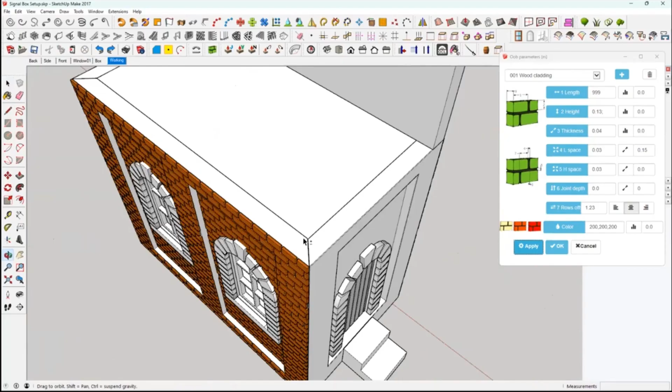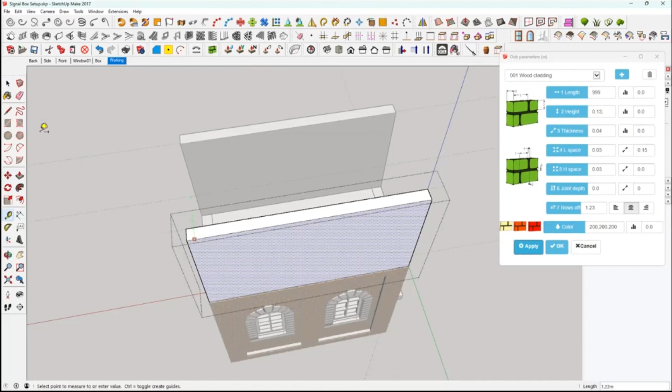If we duplicate that, Control along green, right, Control green, thank you. And basically we'll just offset this one. I think it's 0.32. So if we offset the front, there we go, 0.32, and we'll find the middle.

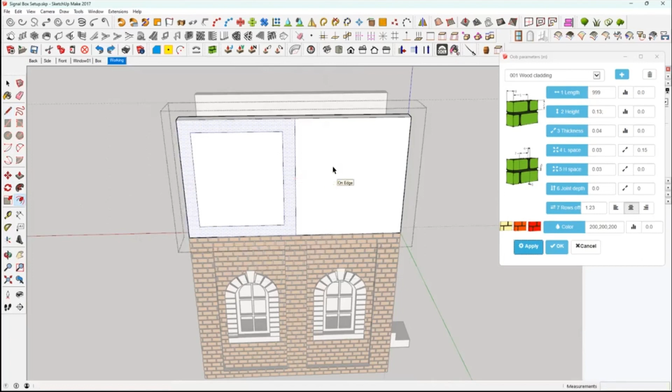We'll do a Control Z on that. We'll put a line down the middle, and then we'll offset that 0.32. Pick that, and we'll offset that, and we'll offset that. Right, now that should push through to the back, and that one should go through there.

Right, now that centre pillar is a bit too big, so we'll cut that down. If we'll do a 0.12 that way, and a 0.12 that way, and we can pull these ends in, make it a little bit thinner.

Right, so we want a board at the bottom, windows at the top, don't we? Well, that was a bit of a mistake then, wasn't it? So if we put a line from the middle to the corner and delete that top bit, reverse the face, and we can pull that out 0.1.

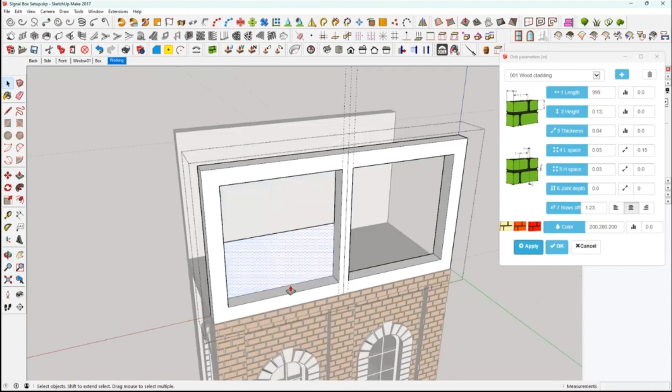And what we'll have to do is just move that across because I haven't made a group. Now sometimes you push pull, you will pull the back through. So the back has gone right through there. So if you do Control Z, let's just copy that one across.

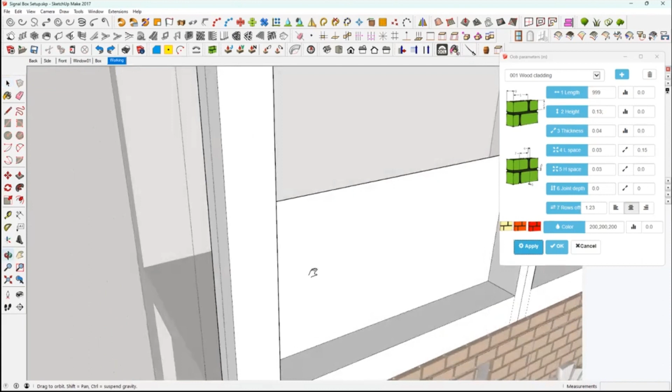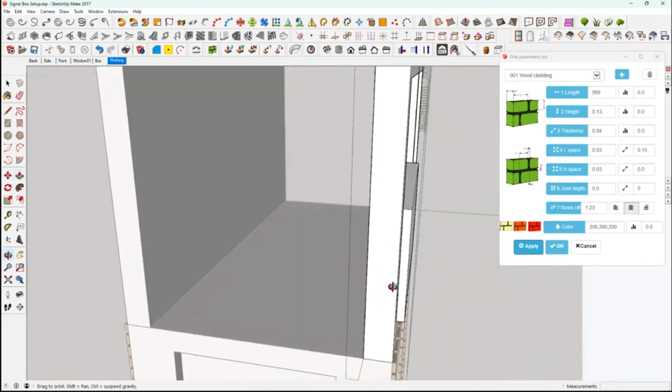To the right. Now if you go to push pull and it pulls through from the back, just press Control as you're pulling and it makes a new face. So you can pull through and it's 0.1. Otherwise you have a gap at the back.

And you see the push pull tool there has got a plus on it. That means you're going to make a new face. Double click that one and that should have push pulled both through. So, all right, we're happy with that, I think. Let's have a look.

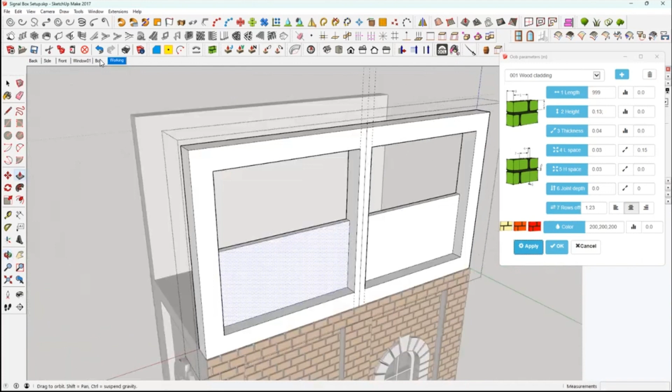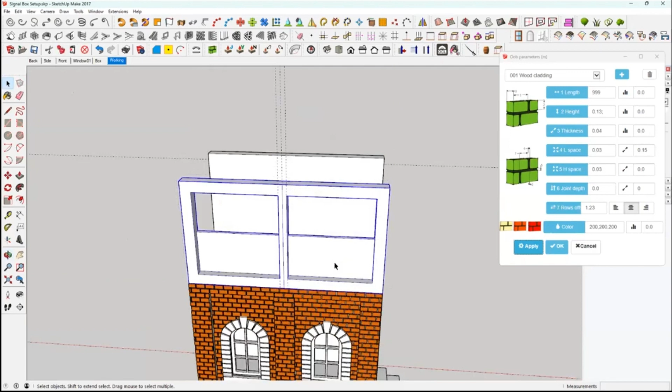Yeah, what did I do? Yeah, that sort of stuff on it, yeah. Oh, I did it straight across, but yeah, we'll go for that. Right, so if we triple click this now, nope. Oh, it's still in a group. Yeah, so that's in the group, so that's all right.

We can put our wood cladding on the front of this. That'll be all right. So what we want to do now is, I suppose we can just copy that up and put our windows in. Looks a bit high though, doesn't it?

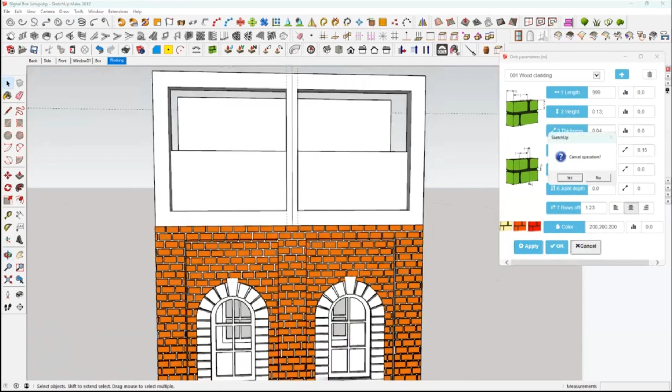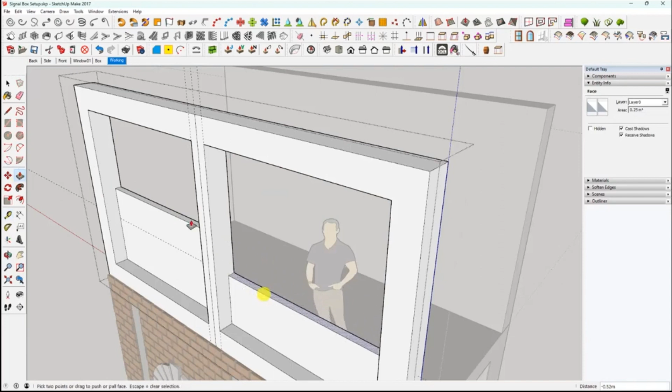I'll tell you what sometimes you can do is get a man. Yeah, too high. So what we do is we click on this and we'll pull it down 1.28. We'll pull it down to about, yeah, that'll do. And the same on the other side.

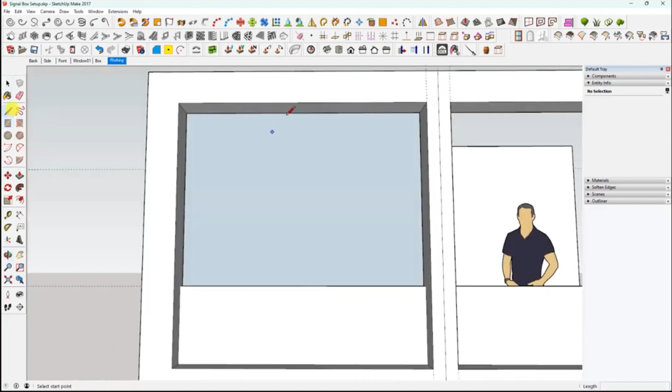So we'll call that quits on the wood paneling, and we can make some windows to go in here. If we just draw a box inside, split it in half. We'll get rid of that side. Reverse the face on there.

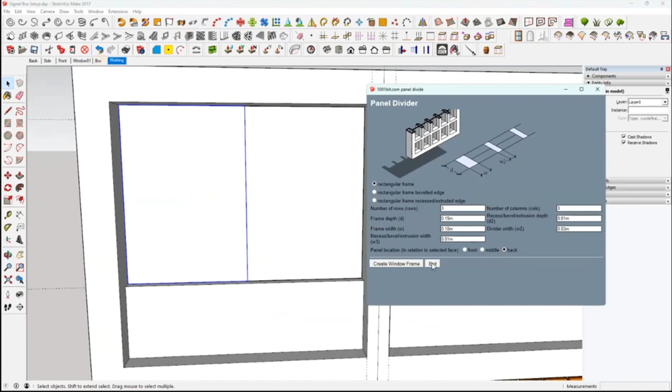So double click, right click, make a group. And we'll come up to a window plugin, which is panel divider. What's that? It's a 3x2. So once again, we should update.

There you go. And panel. And we'll do columns. Frame depth, I normally go for 0.1. It's about 1 mil. The only other one is divider, is 0.04. That's about the width of your nozzle for FDM printed.

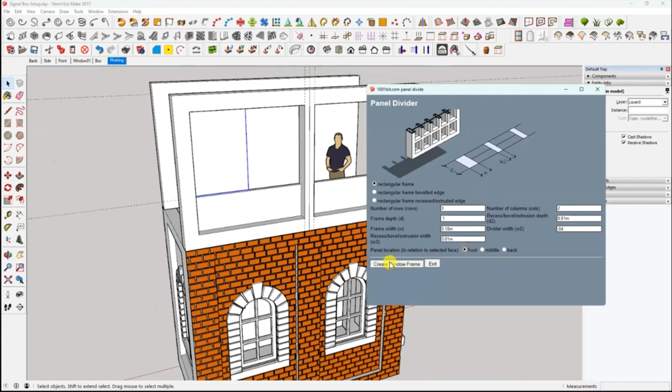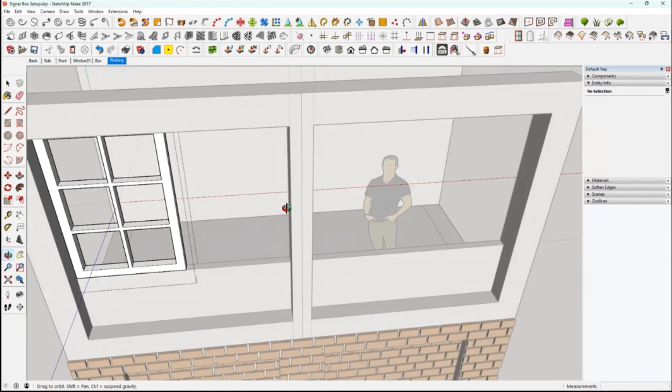On the front, create window frame. So if we double click on there and double click again, no, we'll click, that's it, click the glass, delete the glass, it messes up when you go to slice it.

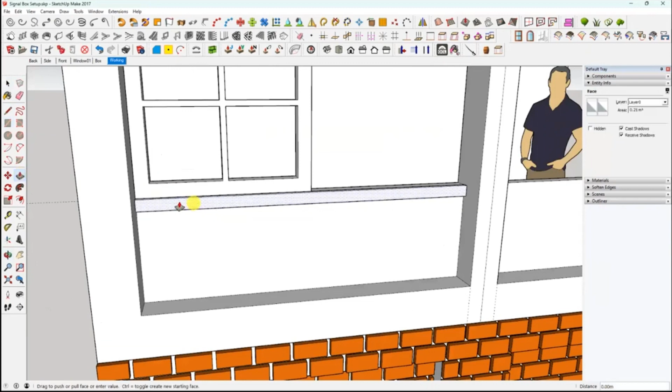So, and what I'd done on the last one, so we'll have to put a bit of a windowsill in, or what we call, not a windowsill, put a box in there and we'll pull it along. So we'll triple click, right click, make a group. So we don't interfere with it.

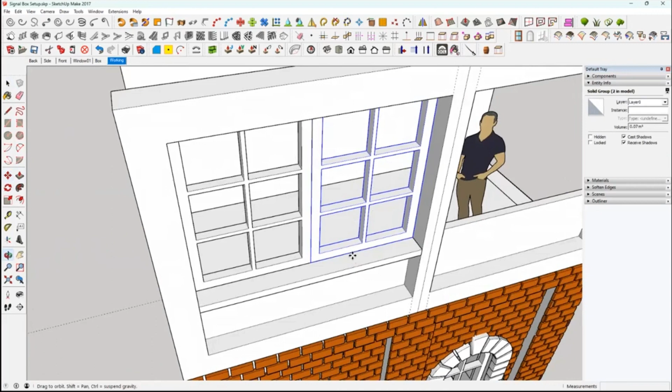Now what I'd done with the last one was duplicate this, Control, right. And if you bring it out a bit, so it's in front of the other one.

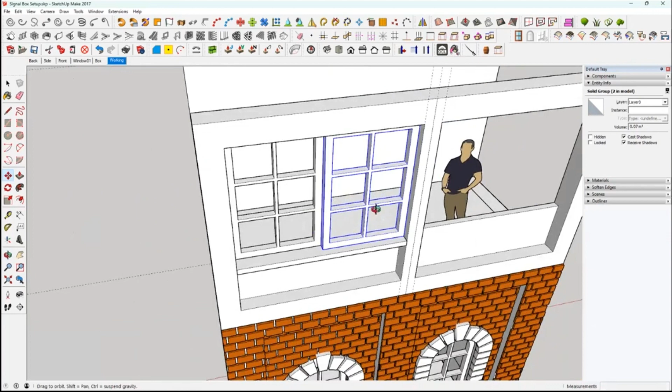And what I did was, I think I just scaled these up a little bit. So they overlap. We'll scale it up at 1.05. And then we'll do the same on the other side. You get a bit of an overlap. Oh no, that'll be all right now.

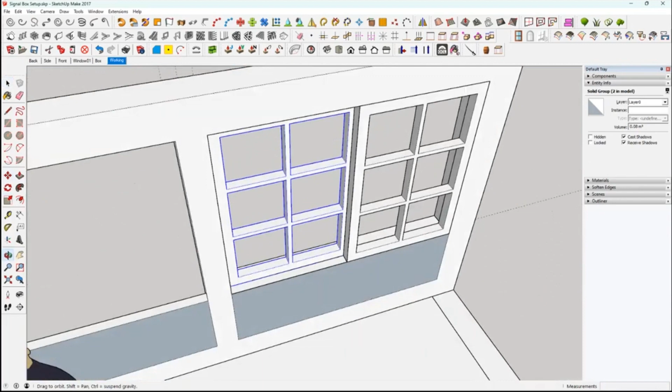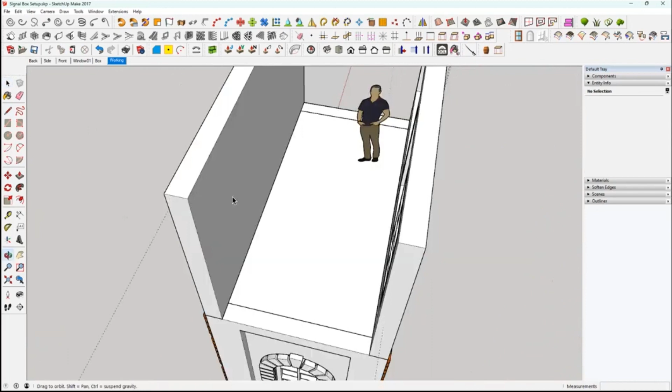That's overlapping. And what I found was, we'll push this windowsill back in a little bit. So your wood cladding will go on there. I've printed it with one panel fixed and this second window.

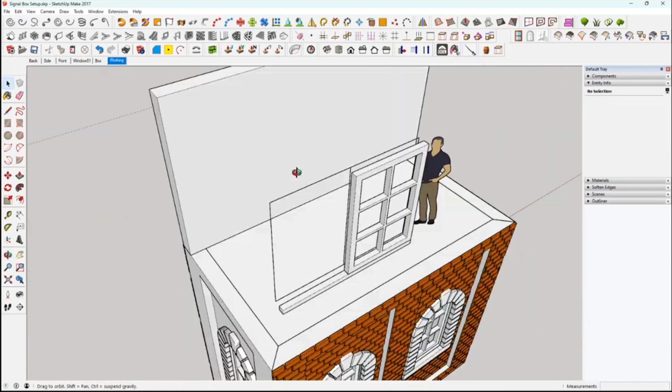So if you click on this window, we'll cut that. We'll double click on the back panel, edit, paste in place. So this panel here, we right click and hide it. So we've got, I can get rid of that. That's left over from the window. So edit and hide.

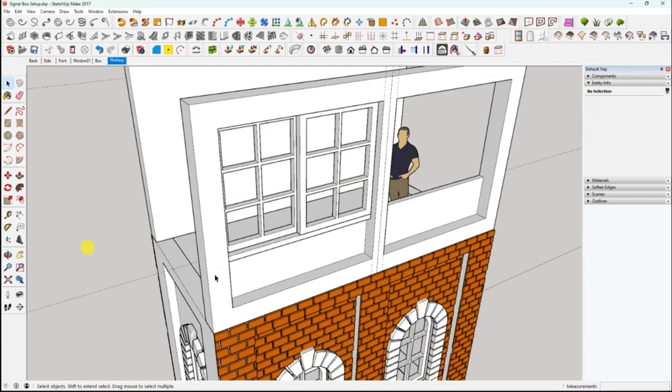So the windowsill needs to be, we'll cut the windowsill and we'll put that in the main model. Edit, paste in place. So that now, with a control with that, right click, make a group. We hide it. Yeah, all you're left to do is the window.

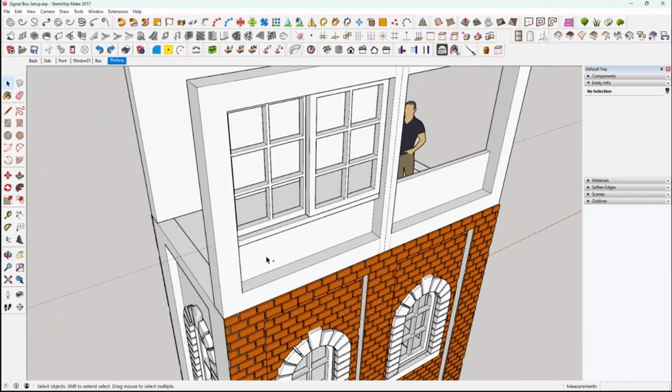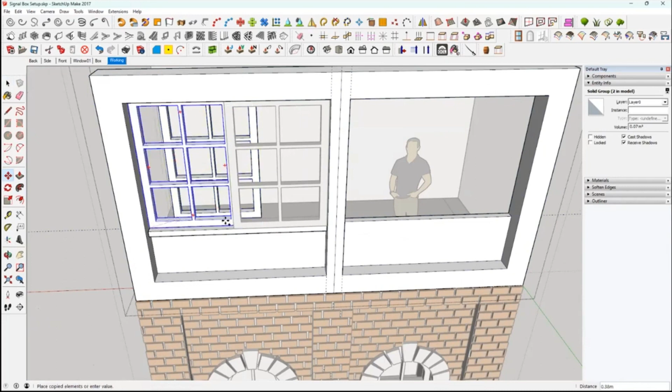So we'll print that separate and print the other bit in one, which is good. So what we need to do is just duplicate, go into the group, click on that window. And it's in a different part. Control along the red. Doesn't matter what side you put it in. Bit of variation.

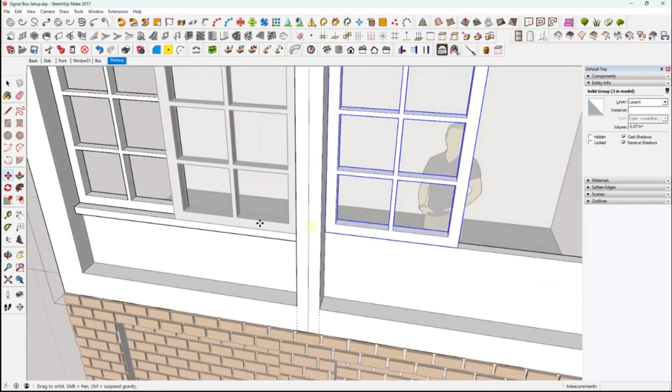Actually, no, because I've got the windows. No, I should have duplicated the whole lot, but there we go. We'll do it this way. Yep. And then we'll do a duplicate on that. Control on the red. So you can have both them windows open.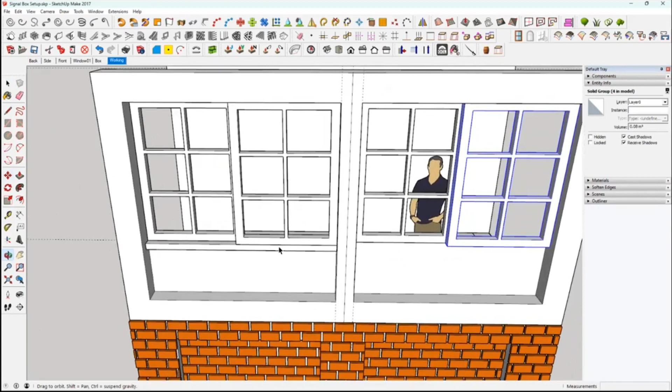I forgot to put that in. So there we go. Control along there. Red. There we go. I think we're in place. Yep.

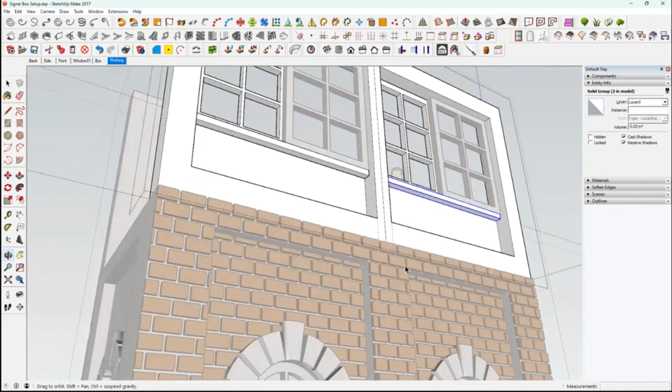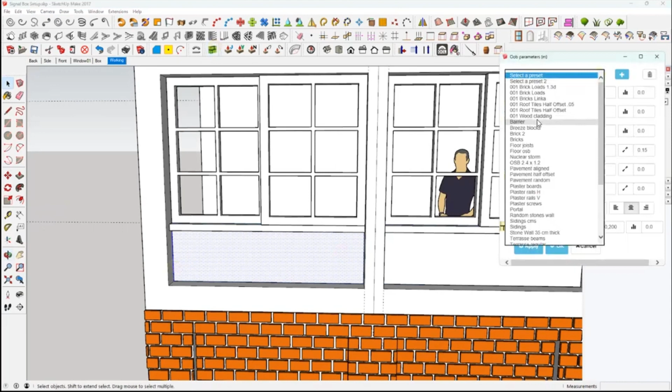Click on the front, control, click on that front, copy them. Click away, edit, paste in place. And then we'll click on the front and the left side, do a control. We'll put some wood paneling on there. Right. And then we'll click on the front there and click on there. And we'll put some wood paneling on there. And it didn't work.